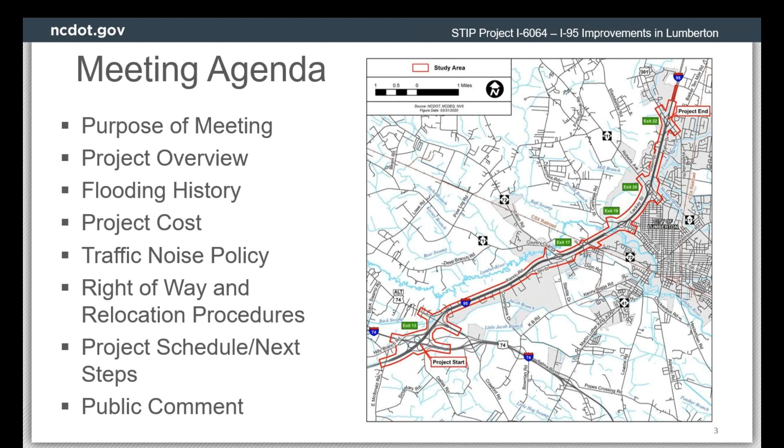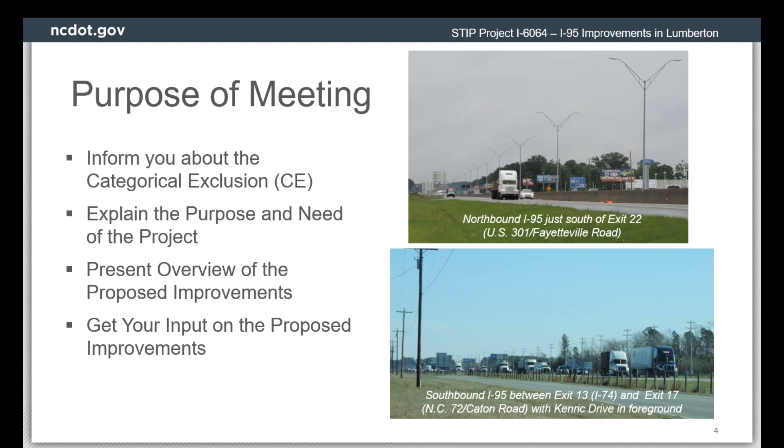So let's start with the purpose of tonight's meeting. Simply put, it's to make you, the public, a part of the project development process. It's just another important step in our continual efforts to make you a part of the process. Specifically tonight, we want to get your input on the proposed design of the project. Project materials, including maps and videos, are available online on our webpage.

Hey Greg, I can hear everybody now. Okay, for those joining via phone only who do not have the visual, please go to our website, ncdot.gov, and in the search bar put I-95 Widening Lumberton, and it will take you to our webpage.

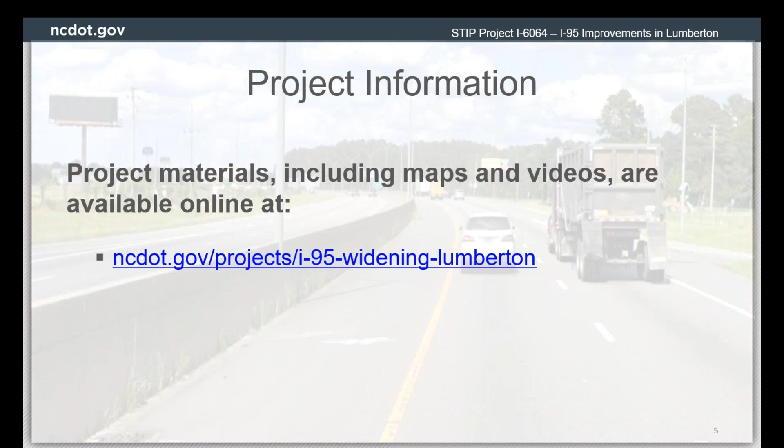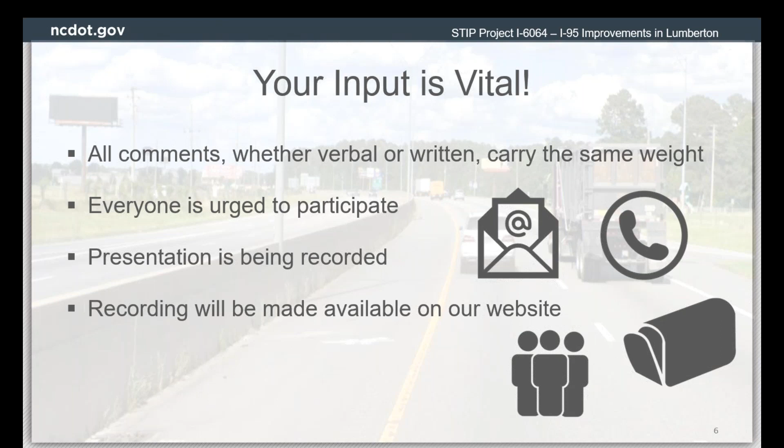Now, your input is extremely important to the development of this project and any other NCDOT project. All comments, no matter how they are submitted, carry the very same weight. We have provided multiple ways for you to participate in this process, and you can do that by submitting your comments here during this live virtual meeting.

You can also go to our website where there's a link to our public engagement portal to provide feedback. You can also send an email, and for those joining via phone only, I'll read it out: I-95lumberton@publicinput.com. So let's say you're not a big fan of computers or technology.

You can call in your comments or questions using our toll-free project hotline. That number is 855-925-2801, and enter the project code 8812. I sometimes joke, if you have a carrier pigeon, you can send that in as well. But the point I'm trying to make is that it's important, and I can't stress enough the importance of you getting your comments into us on this project. The comment period ends October the 15th.

Now you may be asking yourself, well, what are you going to do with the input that you receive? Once the comment period has ended, we will hold what is known as a post-hearing meeting, or post-meeting meeting in this case. This meeting is attended by NCDOT staff from various units and divisions, all of which have had or will have involvement with this project.

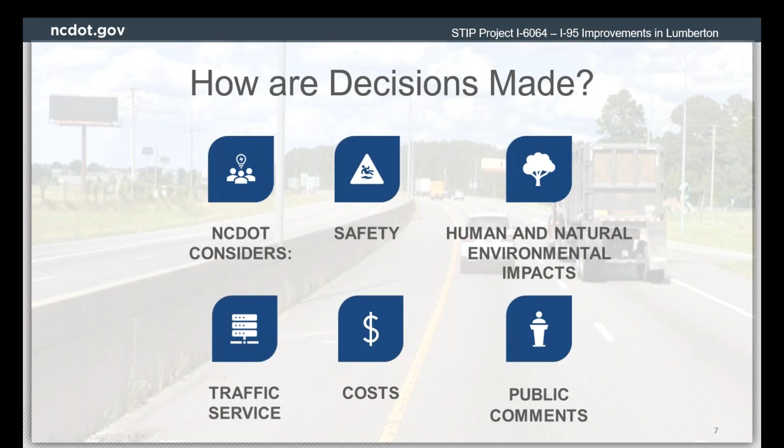Now, the project is being paid for through a mix of federal and state funds.

So let's talk about the why of the project. In transportation terms, that is known as the purpose and need of the project. All alternatives or designs are compared against the purpose and need, and how well they meet it. The traffic volumes along I-95 are anticipated to increase by about 50% by the design year 2040, which will create conditions in which operations degrade and average travel speeds are below the posted speed limit. Forecasted traffic volumes are expected to exceed 100,000 vehicles per day in some locations within the project study area. So to meet this need, the purpose of this project is threefold: to help relieve congestion, improve mobility, and enhance resiliency of this corridor to storm events such that it can continue to serve as a primary East Coast route through the project design year 2040.

The proposed improvements meet the purpose and need of the project. Potential secondary benefits include improved safety, enhanced emergency services, and military preparedness.

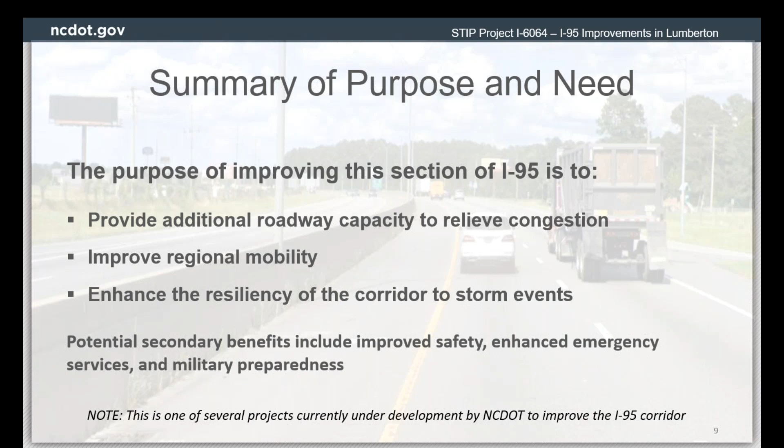Now, the proposed improvements are consistent with the long-range transportation plans for municipalities within the study area. Local governments within the Lumber River Council of Governments, as well as NCDOT, have included this project in their adopted plans.

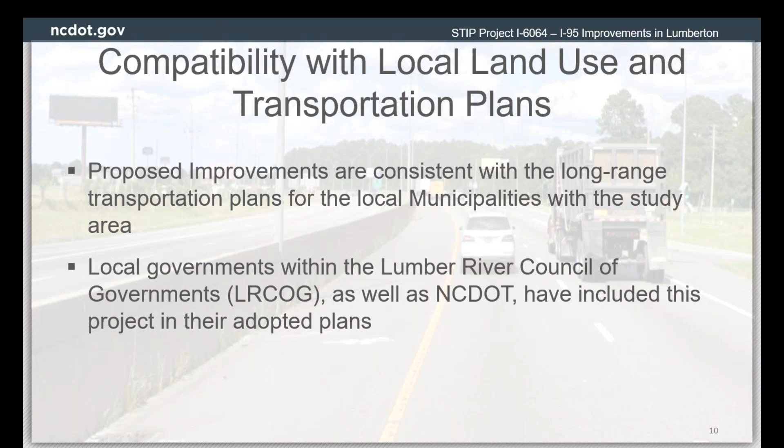So again, to meet the purpose and need of the project, the proposed design would improve about 9 miles of I-95 from I-74, or exit 13, to US 301 Fayetteville Road, which is exit 22 in Lumberton.

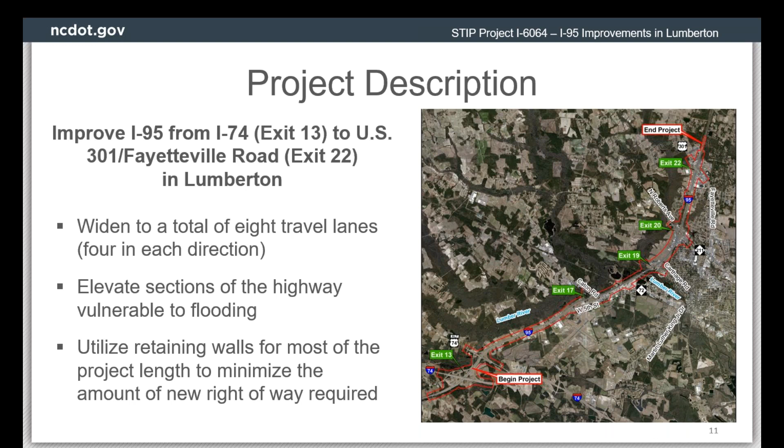This will be done by widening to a total of 8 travel lanes, that's 4 in each direction, and elevating sections of the highway that are vulnerable to flooding. To construct these improvements while maintaining the existing service road system and minimizing the amount of new right-of-way needed to construct the project, the design will utilize retaining walls for the majority of its length.

Now, I-95 in the vicinity of Lumberton has experienced major flood events recently: Hurricane Matthew in 2016 and Hurricane Florence in 2018. Both storms resulted in a partial or complete shutdown of the highway within the project limits until those floodwaters receded. To improve the resiliency of this vital interstate facility, the highway will be elevated in vulnerable sections and major hydraulic structures will be improved.

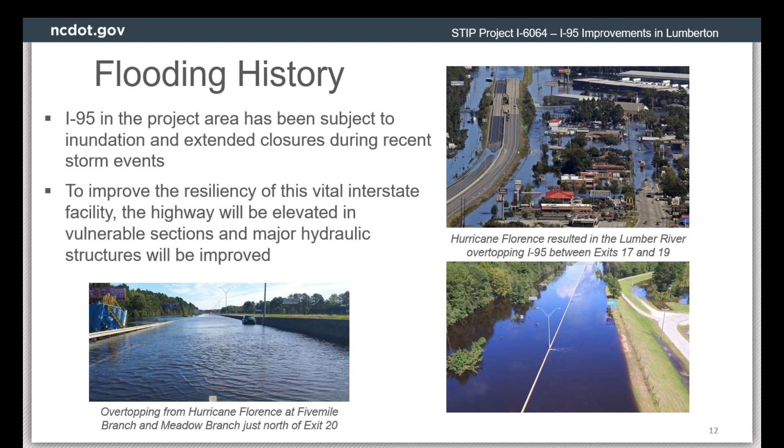So to inform the design process, we conduct detailed hydraulic studies to determine the appropriate roadway elevation to provide resilience against a 100-year storm, which is our current policy. Our past policy involved designing projects to accommodate a 50-year storm.

Now, ultimately, the preliminary roadway designs will raise I-95 in the vicinity of NC 72, or exit 17, between 4 and 6 feet. In the vicinity of Meadow Branch and 5 Mile Branch, I-95 will be elevated between 4 and 8 feet, with the largest elevation change occurring at the new Lumber River Bridge, where the main line of I-95 will be raised by about 13 feet.

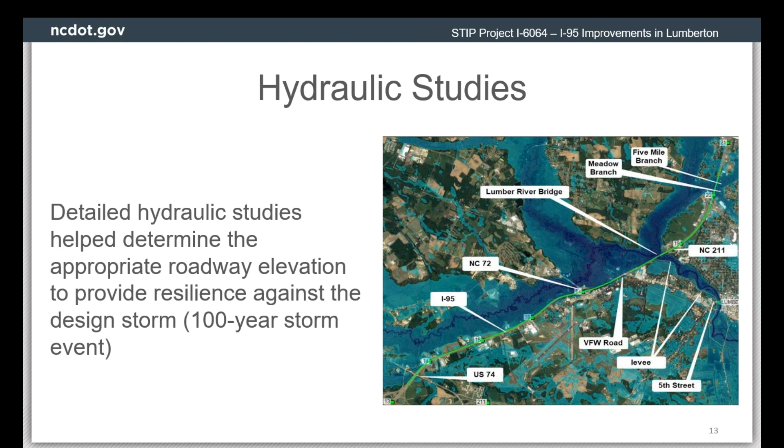The interchanges at either end of the project, the I-74 and the US 301 interchange, which is exit 13 and exit 22 respectively, are anticipated to remain largely unchanged.

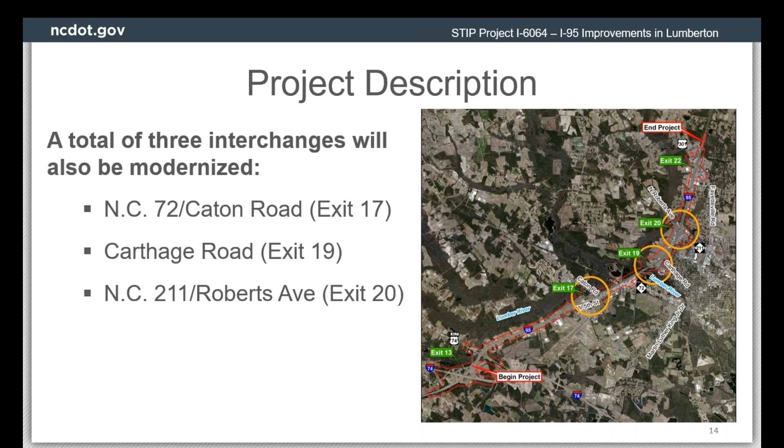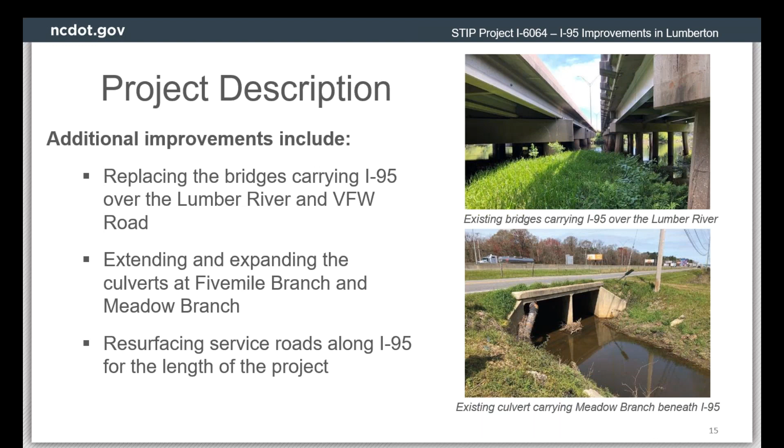Additional proposed improvements include replacing the bridges carrying I-95 over the Lumber River and VFW Road, and extending and expanding the culverts at 5 Mile Branch and Meadow Branch to add stormwater capacity. Service roads along the length of the project will also be resurfaced.

And we'll take a quick, more detailed look at these interchange improvements.

At NC 72, or exit 17, the existing diamond configuration and traffic signals will be retained. The bridge carrying NC 72 over I-95 will be replaced. Now, the bridge carrying NC 72 over the Lumber River will not be replaced as a part of this project.

Also, to the east side of the interchange, median and sidewalks will be added along 5th Street within the project limits.

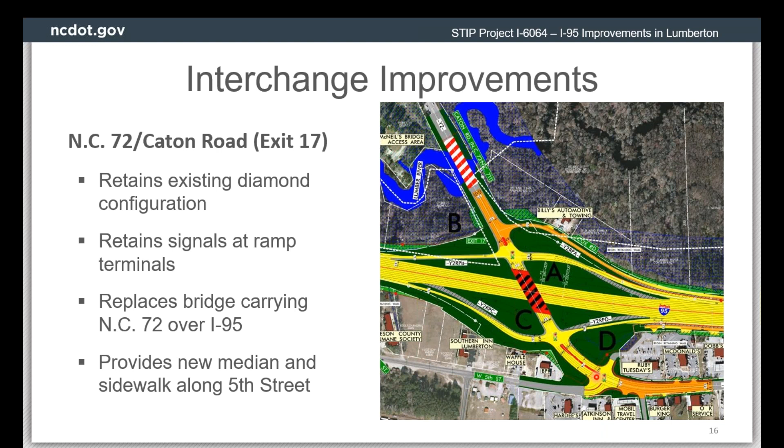Now, at Carthage Road, which is exit 19, the existing diamond configuration will be retained. However, at the on and off ramps, which are now stop controlled, they will be replaced with roundabouts on either side. A video showing how to navigate a roundabout is posted on our project page.

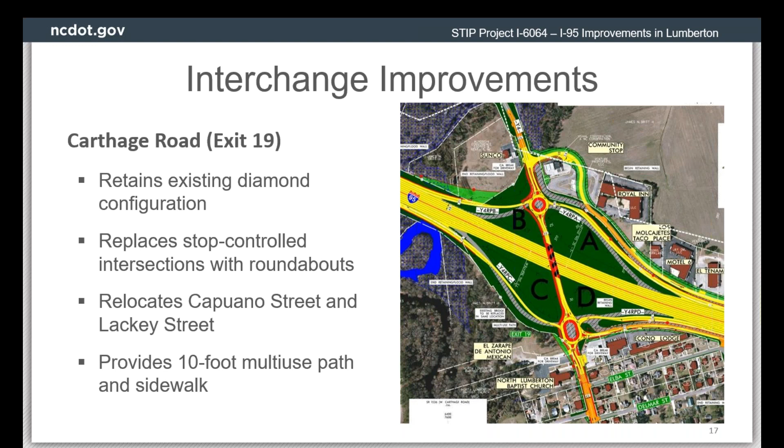Also, to accommodate the reconstructed interchange, the service roads, Lackey Street and Capuano Street, will have to be relocated somewhat. Capuano Street will tie into this easternmost interchange at Carthage Road, and Lackey Street will tie in with Carthage Road just to the west of where it does currently. A 10-foot multi-use path will also be constructed along Carthage Road and across the bridge over I-95.

At NC 211, Roberts Avenue interchange, which is exit 20, the existing partial cloverleaf configuration will be replaced with a diverging diamond interchange. This proposed design will look and operate similar to the diverging diamond interchange at I-95 and US 301, exit 22, which is just 2 miles north of here. We do have a video showing the general operations of a diverging diamond interchange on our webpage. I encourage you to watch that.

The project will also replace the existing single bridge carrying NC 211 over I-95 and replace it with 2 bridges.

There will also be some resurfacing, grading, and realignment work required along the parallel service roads: Lackey Street, Capuano Street, Dawn Drive, and Pond Drive. A 10-foot multi-use path will be provided across one of the bridges and extend to the western project limits to provide a more walkable connection to the nearby French Park.

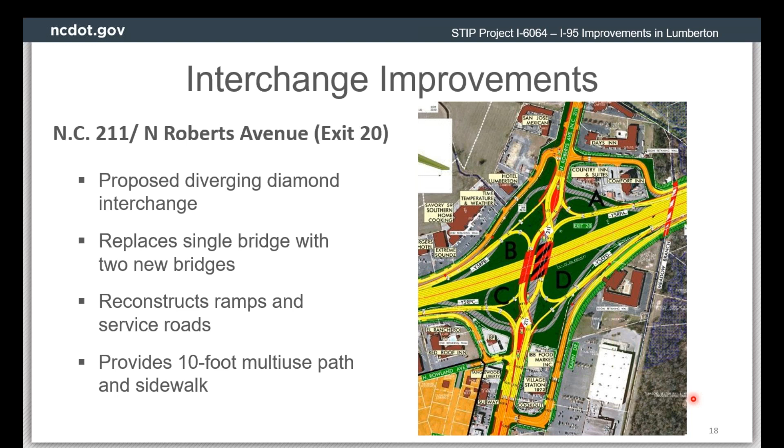Now we will review the roadway cross sections. As mentioned earlier, all of the cross sections include a total of 8 12-foot travel lanes, 4 in each direction, with paved inside and outside shoulders and a concrete barrier median. As shown on this slide, cross section 1 utilizes retaining walls along the outside shoulder to contain the widened and elevated interstate. Cross-section 1 will be used for the majority of the project corridor, though the wall height will vary depending on the proposed elevation change along I-95.

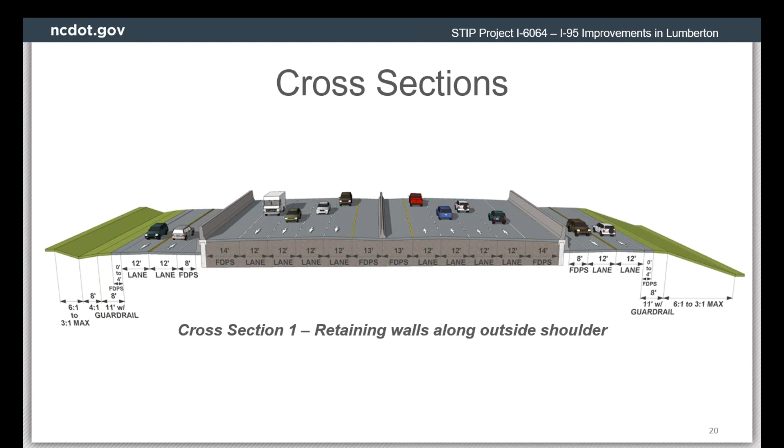Cross-section 2 includes a concrete barrier along the outside shoulder rather than a retaining wall. This cross-section will be used in areas where parallel service roads are present and the elevation of I-95 will remain generally unchanged. A combination of cross-section 1 and cross-section 2 will be utilized at the southern end of the project between exit 13 and exit 17.

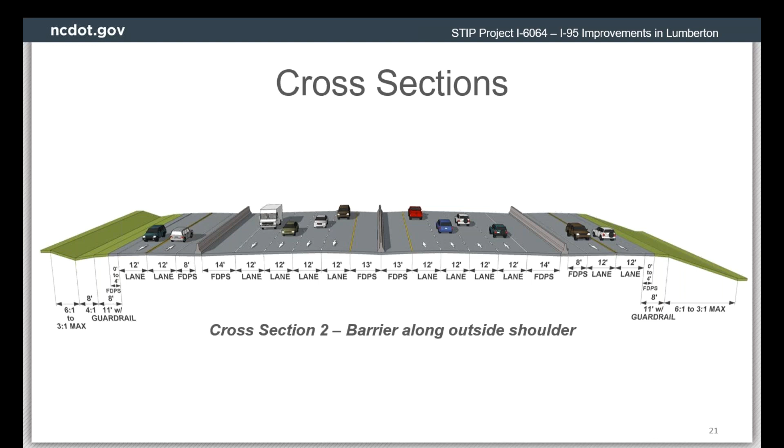Cross-section 3 will utilize grass slopes along the outside shoulder instead of a retaining wall or barrier. This cross-section will be used in areas where parallel service roads are not present, generally including the southern and northern project limits and between the on and off ramps at each interchange.

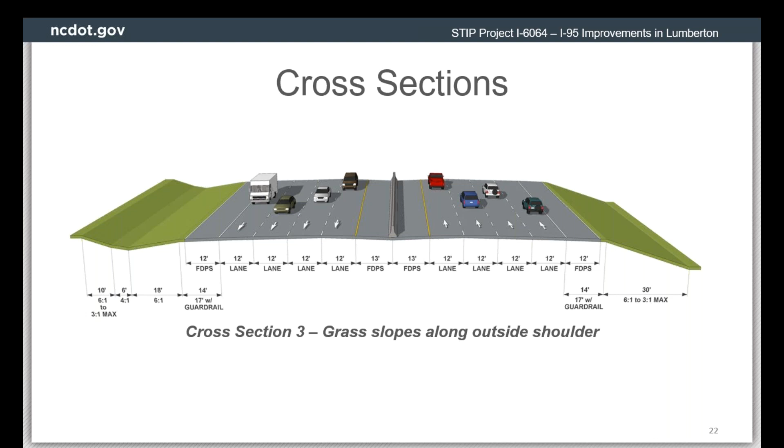Preliminary cost estimates have been prepared for this project. The estimated costs are as follows: $40 million for right-of-way acquisition, $1.2 million for utility relocation, and roughly $418.6 million for construction. That adds up to a total estimated project cost of $459.8 million. Please note these cost estimates are preliminary and subject to change.

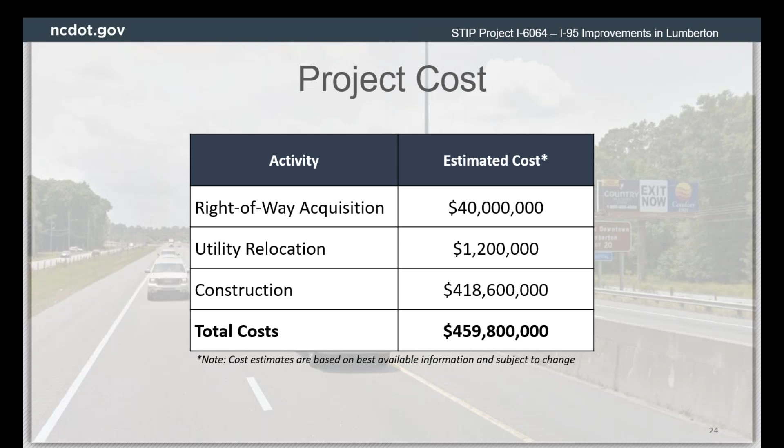A tentative schedule has been developed for the next steps of the project. Following this meeting, we'll have a post-meeting process where we go through and summarize all the comments and respond to them, incorporating them where feasible into the project.

All of this work leading up to this step will be cataloged and captured in the federal categorical exclusion, the environmental document being prepared for this project. It is expected to be completed this winter. The project will be awarded for a design build in summer of next year, with right-of-way acquisition beginning shortly after in the fall. If you have any questions about the design build process, please enter those in the chat box.

Construction is planned to begin in 2022 and last through 2026.

The design build process allows the department to hire a team of contractors and designers responsible not only for the final design of the project, but also the right-of-way acquisition and construction. This process is more efficient than our traditional process, resulting in faster completion dates because it gives the design build team more flexibility. The team could be purchasing right-of-way in one section, finishing design in another, while constructing yet another portion. As a result, over the years we've seen innovative designs that further reduce impacts and costs.

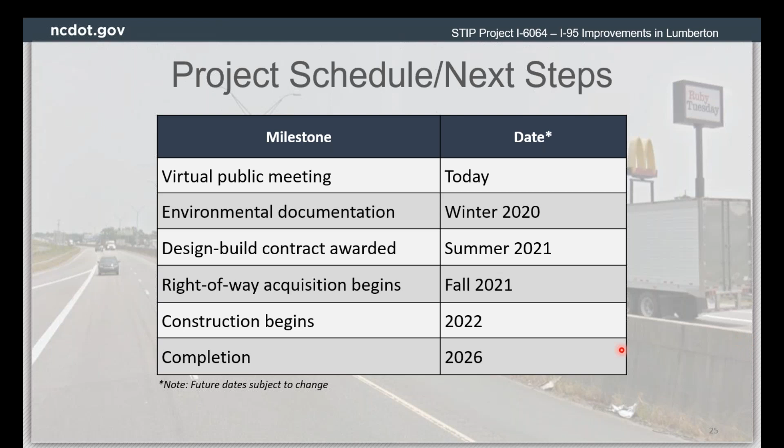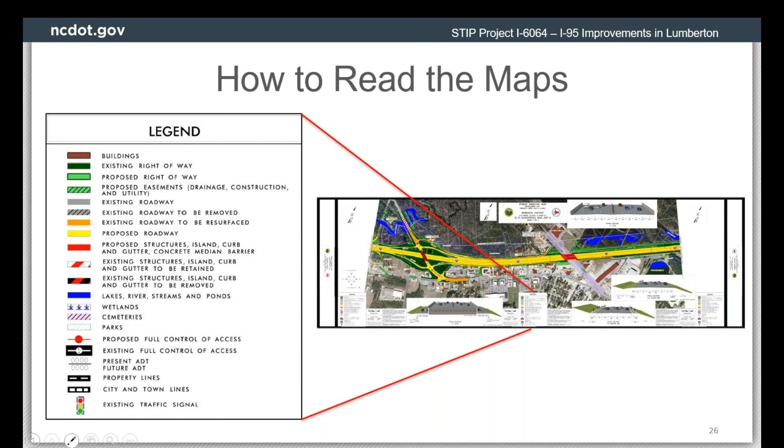The public meeting maps I mentioned earlier are on our website. I'm not going to go through each map right now, but each map includes a color-coded legend representing the proposed improvements. We have a video describing how to read those maps on our webpage, so I encourage you to look at that and review the maps. And if you have questions, contact the project team.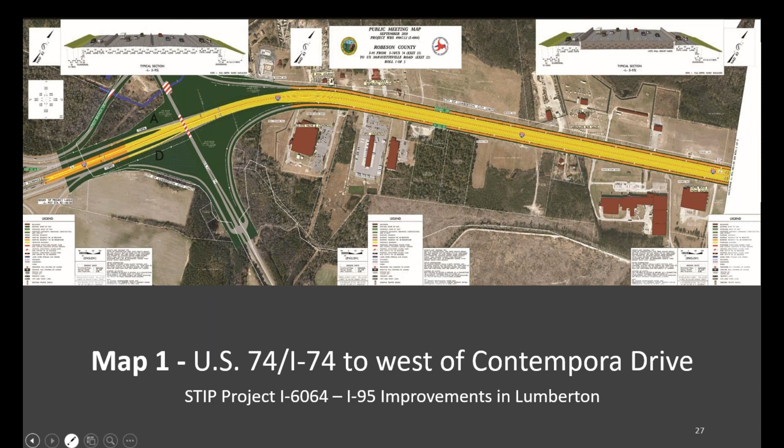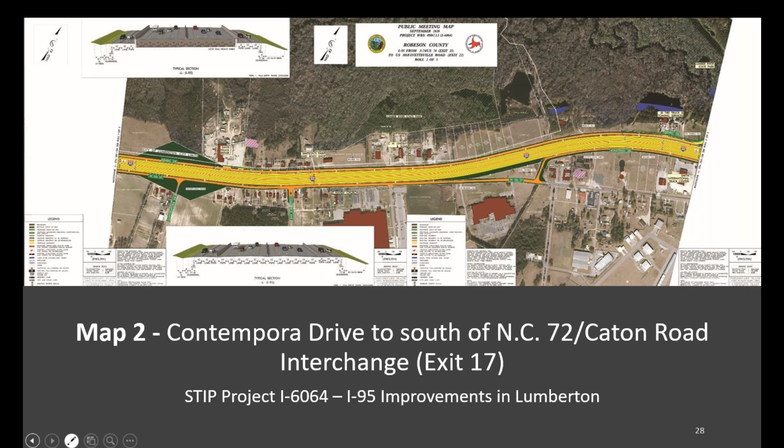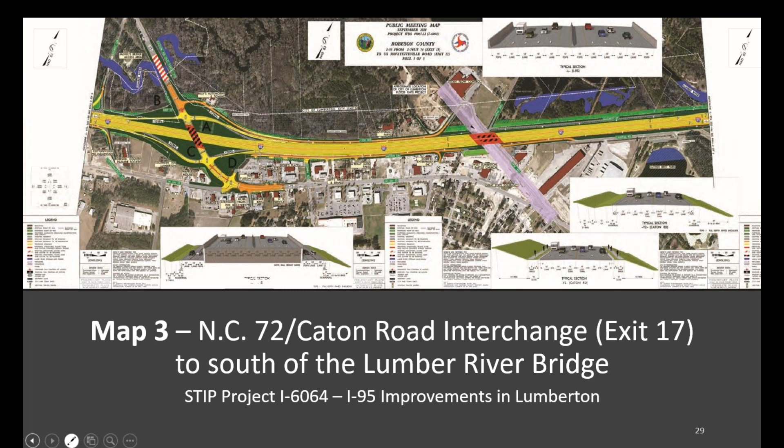There are 5 maps. Map 1 runs from US 74 or I-74 to west of Contempora Drive. Map 2 runs from Contempora Drive to south of the NC 72 Caton Road interchange, exit 17. Map 3 runs from exit 17 to south of the Lumber River Bridge. Map 4 runs from the Lumber River Bridge to Wellington Road. And map 5 runs from Wellington Road to just north of the US 301 Fayetteville Road interchange, exit 22.

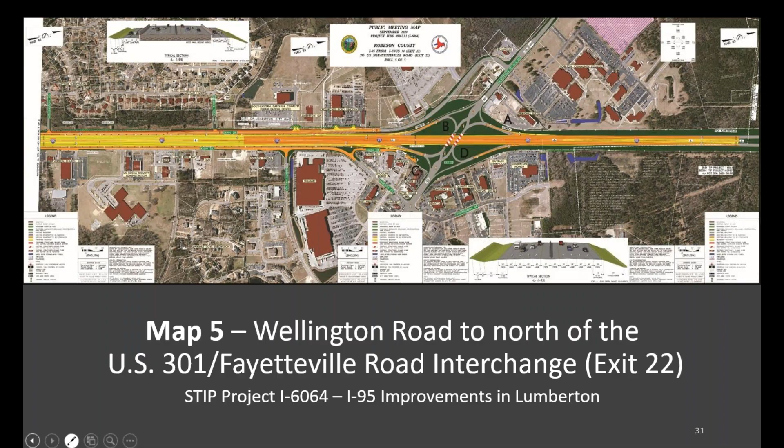Since I did not review the maps with you, I'm going to play a visualization for you, a 3D rendering of the project, which I think is more beneficial for understanding the proposed improvements. We'll go through this, and it takes about 3 minutes.

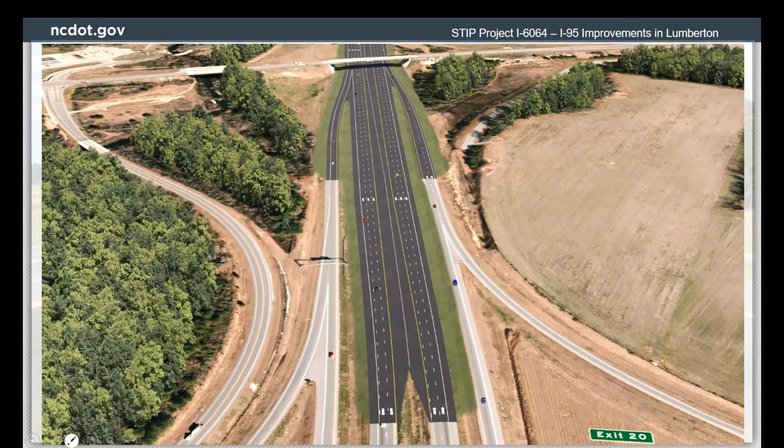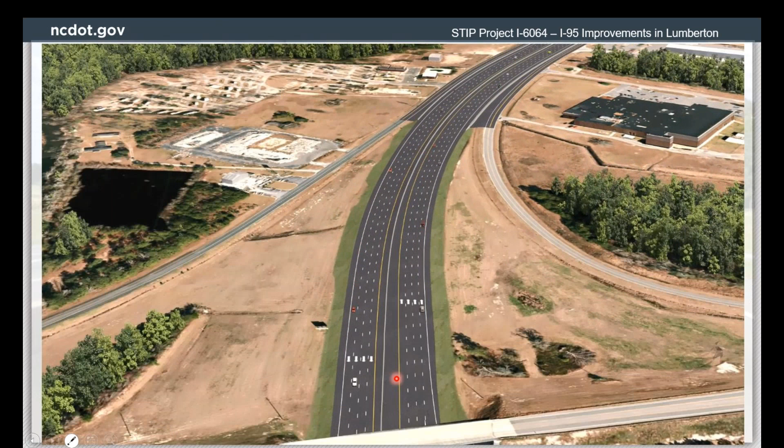All right, so here we are at the I-74 interchange. As you head north, this will be Kenrick Drive on your left, the west side of the project, and on the right you have West 5th Street.

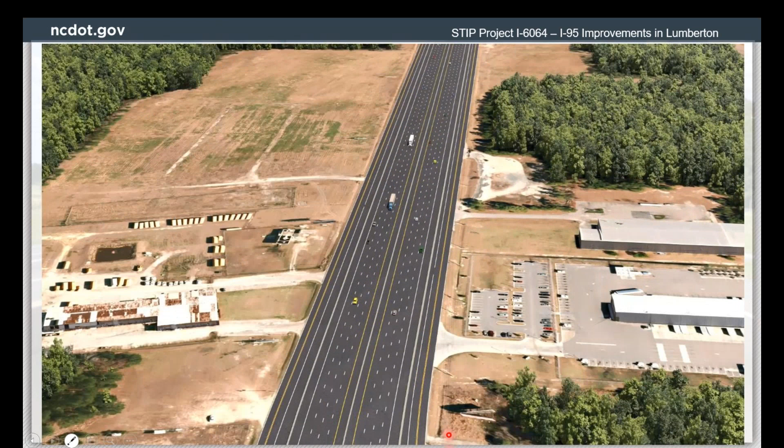While we're traveling along, I wish I had some music playing, but I do want to give kudos out to our visualization team for bringing this project to life.

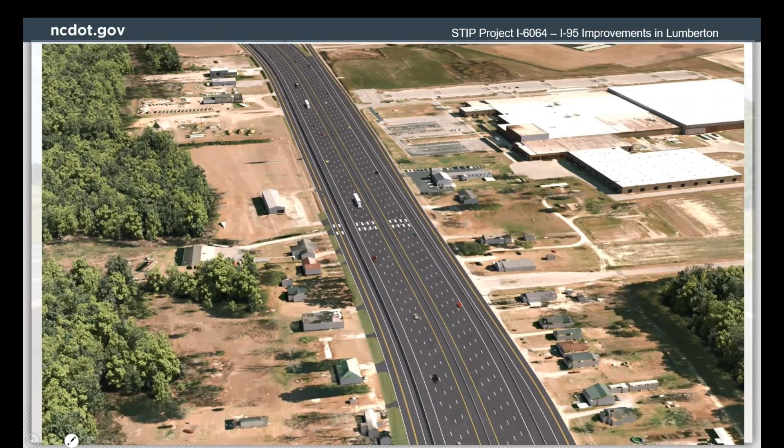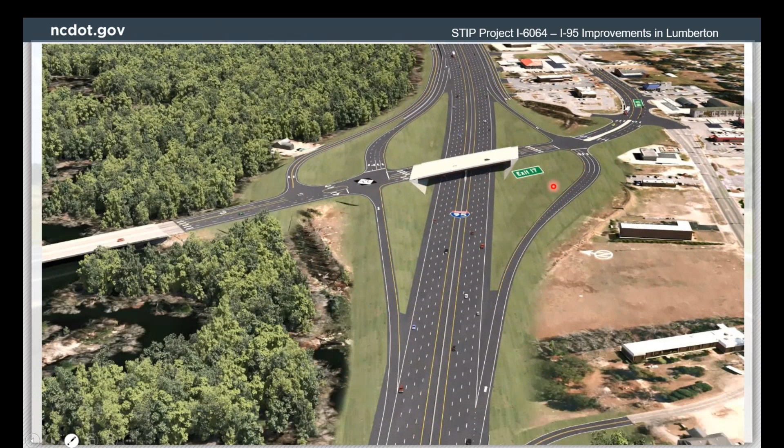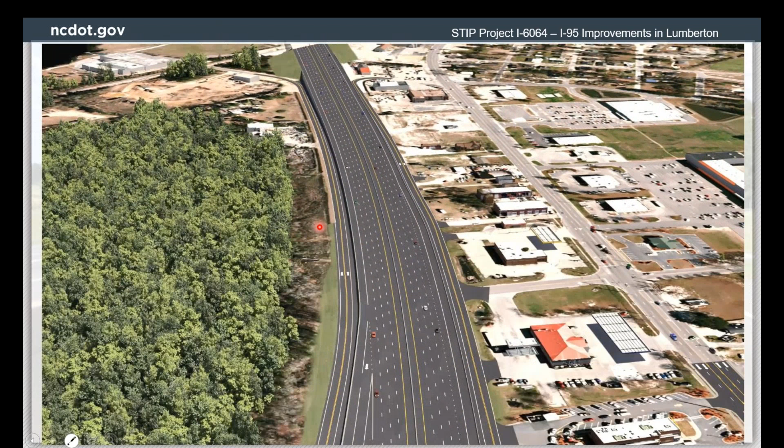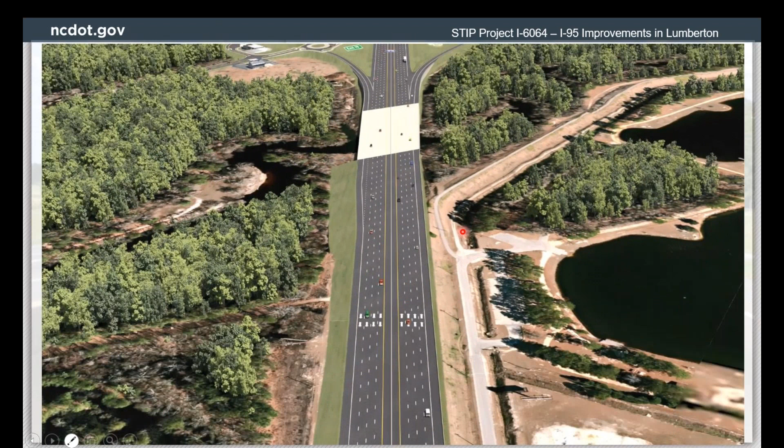We're coming up on Jonathan Drive, adjacent to I-95 here. We come up on exit 17, again keeping that diamond interchange. Here we have Cox Road on the left, with a drive on the east side. Here's West 5th Street, VFW Road, and the CSX Railroad crossing. And here's Crystal Road. The bridge crossing, here's exit 19, again these are roundabouts.

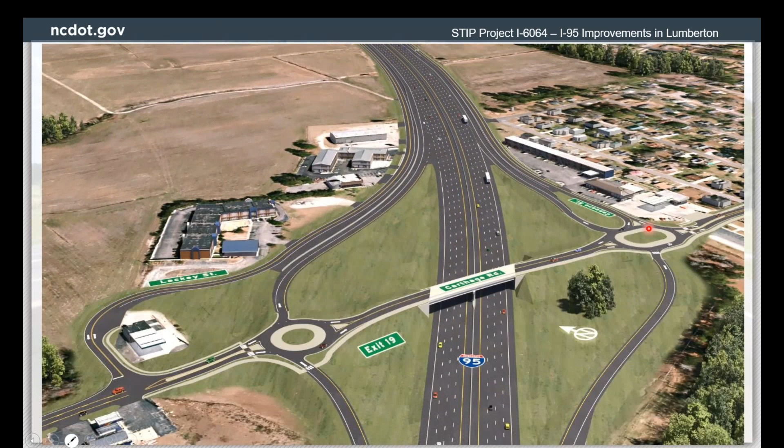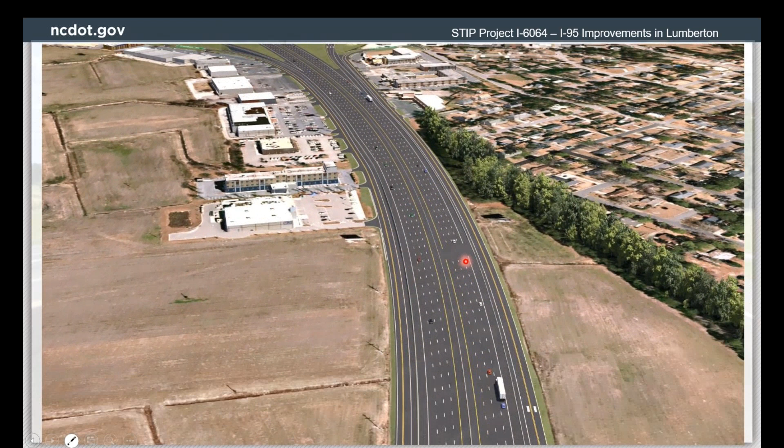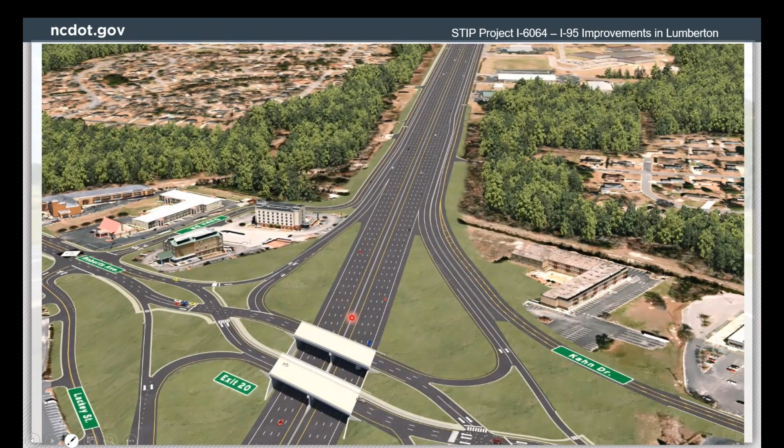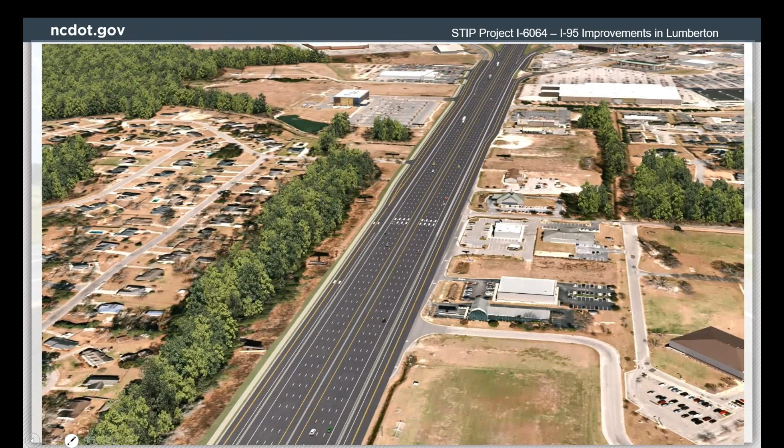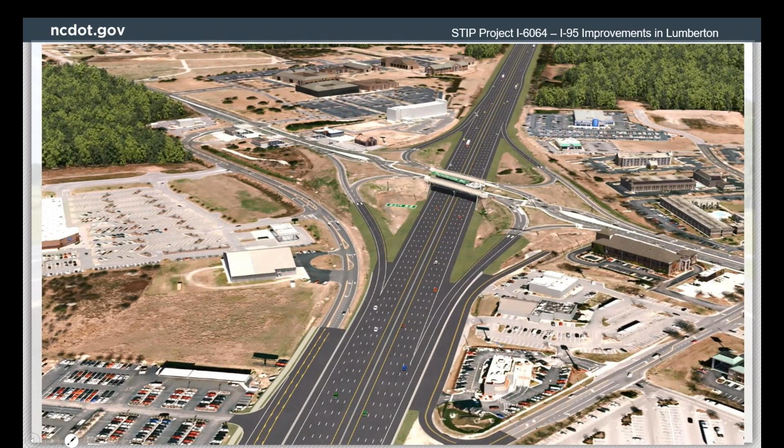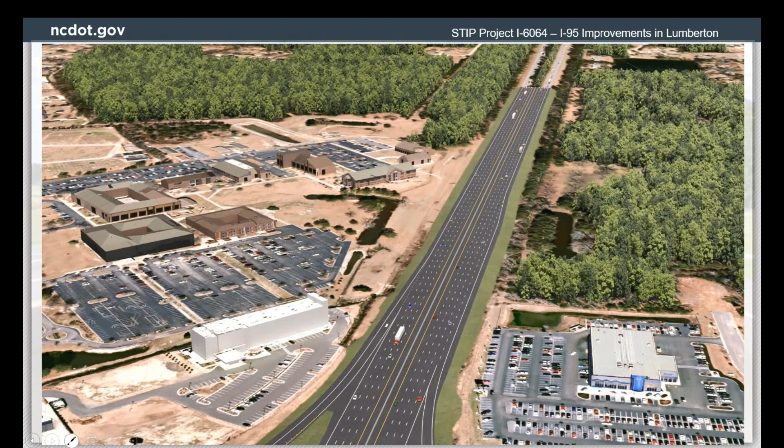We're approaching exit 22, which is US 301, and again no real changes to this interchange. The project limits will extend about a half mile north of here, where they will tie into another I-95 project, I-5987, which widens I-95 from exit 22 to exit 40.

Now real quick about traffic noise. Preliminary noise analysis for this project is currently underway. The location of noise barriers will be determined during final design. To be considered for noise abatement, a land use must have a building permit issued on or before the date of public knowledge, which is the approval date of the final environmental document. For this project, that is the categorical exclusion, or CE, which is being prepared and expected to be approved this winter.

Once recommended noise barrier locations are identified during final design, all property owners and tenants who are benefited by a barrier will be asked to vote on it. At that time, NCDOT will contact property owners and tenants eligible to vote and explain the balloting process and what they are being asked to vote on. Only recommended noise barriers that pass the voting process will be constructed.

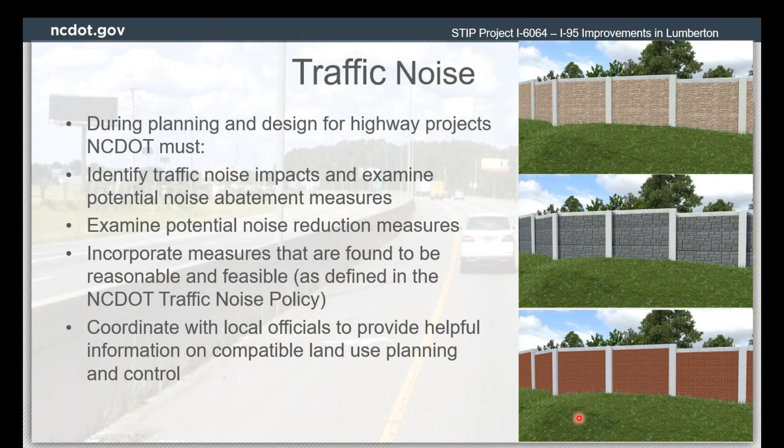Having runaway mouse issues, please excuse me.

Let's talk about the right-of-way procedures. Once decisions are made regarding the final design of the project, the limits of the project will be staked in the ground. If you are an affected property owner, a right-of-way agent will come out to meet you. They will explain the plans and how it affects you as a property owner and your rights. If permanent right-of-way is required from you, an appraisal will be completed, and based on that appraisal, a right-of-way agent will come back out and make a written offer based on the current market value of the property at its highest and best use.

In this process, the department must treat all owners and tenants equally. We must fully explain the owner's rights, pay just compensation in exchange for property rights, and also furnish relocation advisory assistance. If your home or business is to be acquired and you're being displaced as a result of this project, additional assistance in the form of advice and monetary compensation is available.

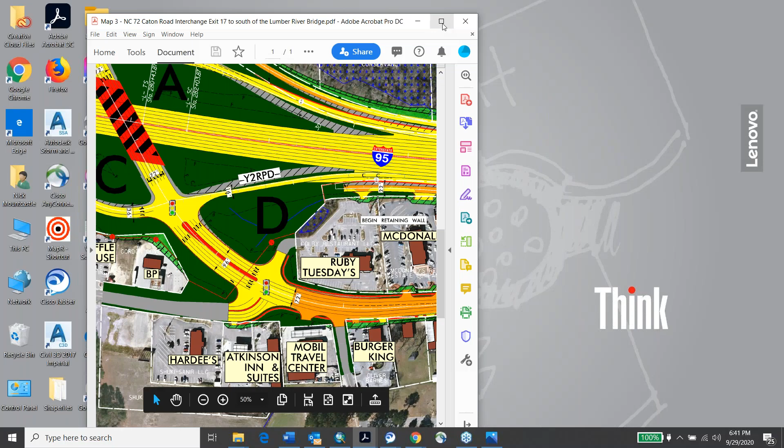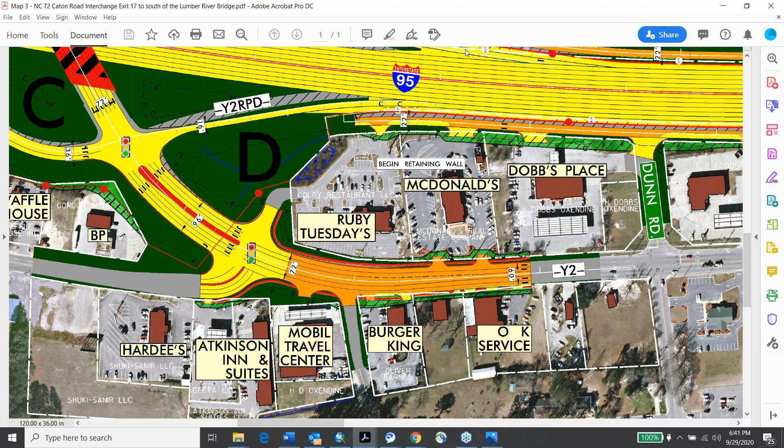So we're zoomed in here at 5th Street, and you can see these red lines represent the 5-foot sidewalk on either side of the facility. That goes back essentially to the OK Service building and Dobbs. So yes, to answer your question, sidewalk will be on both sides of 5th Street. All right, thanks Nick.

So next question is from Mr. Clark O'Neill. Currently on the southbound side of 95 between exit 19 and exit 17, there isn't a service road. Is there plans to add a service road between these two exits with this project? Nick, would you like to answer that one?

Right now there is a service road, Cox Road, between exit 17 and VFW Road. That will remain as is, though it will be resurfaced. To the north of VFW Road there is Hackett Street, a partial service road that doesn't go on the north side of the Lumber River. At this time, the project is planning to potentially remove that, but we are coordinating with the city to provide additional access there. There has not been any discussion about providing a service road to the north side of the Lumber River that would connect to exit 19 at Carthage Road.

All right, thank you so much. Next, Mr. Brandon Love says the city of Lumberton has been working with a retail consultant over the past 5 or 6 years in an effort to recruit new commercial, hospitality, and retail businesses. Since Ruby Tuesday at exit 17 closed, our consultant has identified at least 2 potential retail developments which have shown interest in the site. One issue that continues to be brought up is the right-only driveway exit from the parking lot onto West 5th Street. Since the exit 17 bridge and approaches will be replaced, would it be possible to improve the alignment of this driveway entrance and adjust the signalization in order to accommodate a full service driveway? This would be a great improvement, which will no doubt increase the marketability of the Ruby Tuesday site.

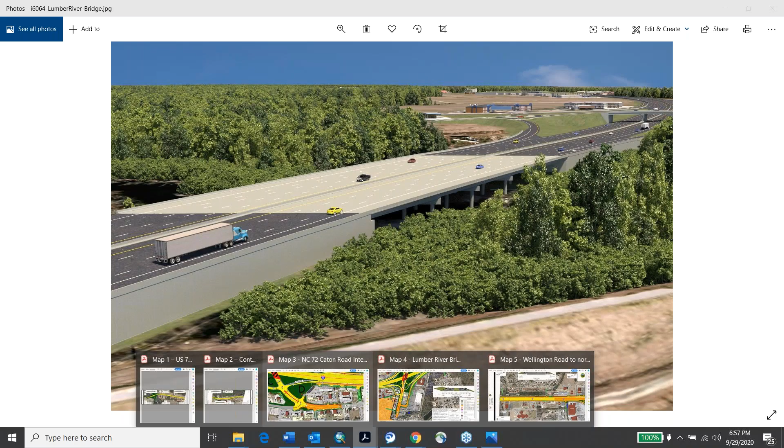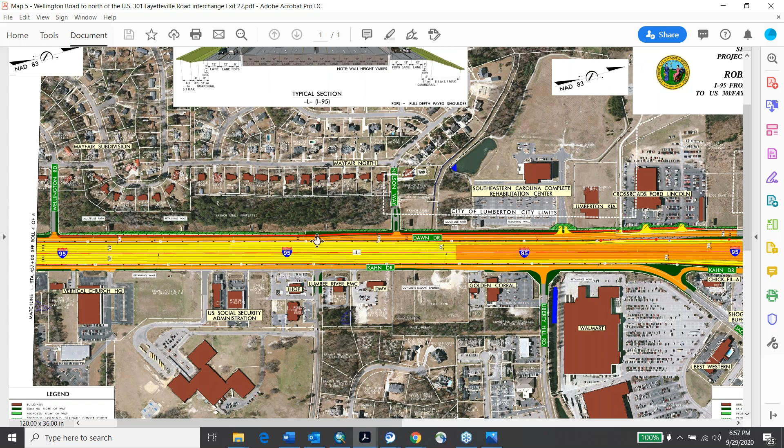So the vicinity of exit 22 that shows up on map 5, along Don Drive and Kahn Drive, are largely within their existing footprint. These areas of green hatching are proposed easement, so there are some minimal areas of that as you approach exit 22. Moving to the north here, you can see the proposed roadway width is very similar to the existing roadway width. And again, at exit 22, we're proposing to retain those bridges in the existing interchange configuration.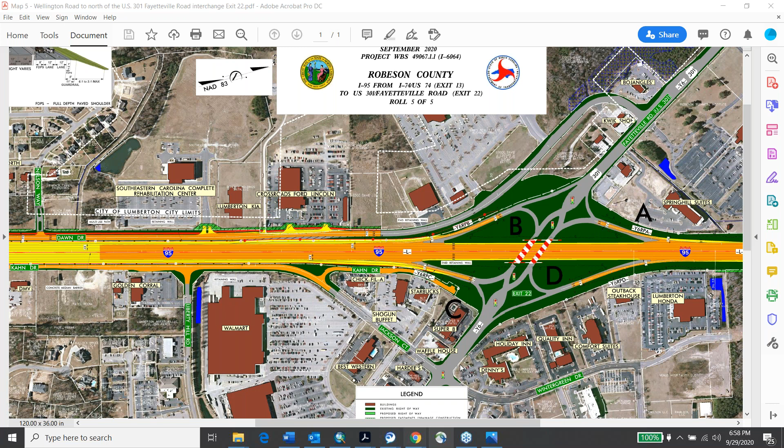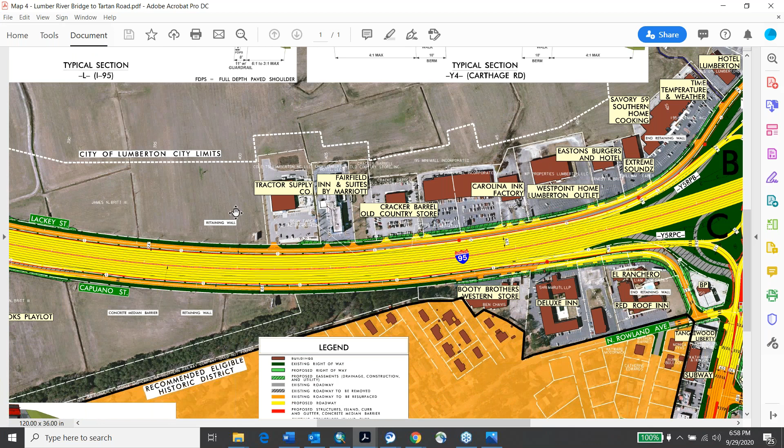All right, Nick, don't go anywhere. The next question from Pradeep Sharma is, what are the impacts on Lackey Street? I guess if you could just run down the two maps of Lackey Street, I believe most of the impacts would be on the southern end with the relocation.

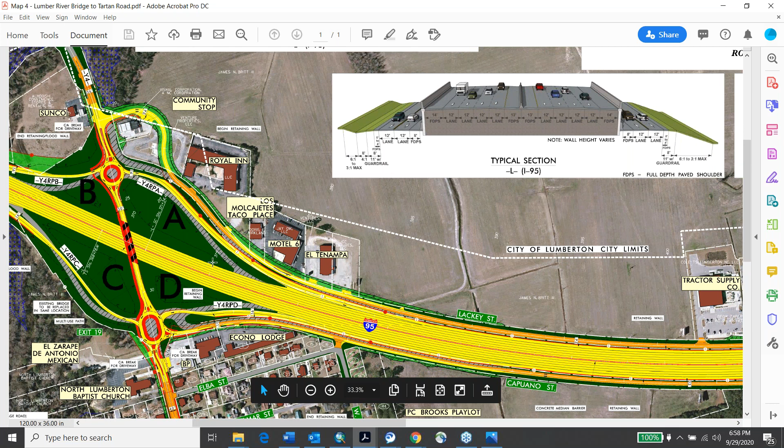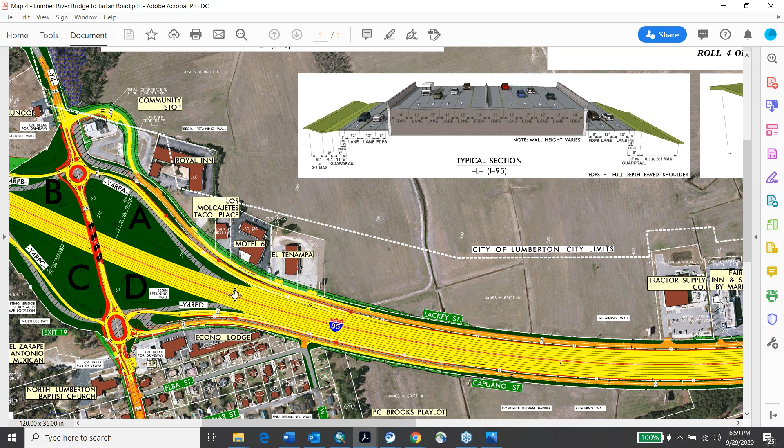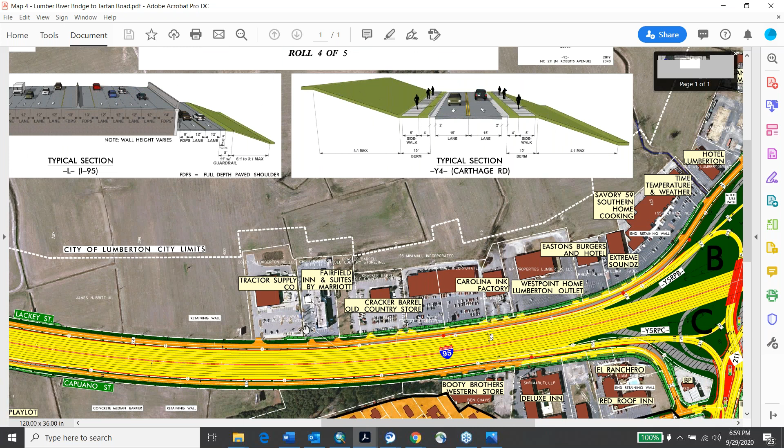Yeah, that's correct. Let me just get back to this map here. Can you all see the Carthage Road interchange now? Okay, so this is Lackey Street up here on top of the screen. This is the proposed relocation down at the southern end at Carthage Road. Anybody in this area might be familiar with that under the Carthage Road interchange project. We are showing some additional construction easement and right of way leading up to that. As you move to the north, Lackey Street is again generally in its existing location. Coming up on exit 20, there are some additional areas of construction easement moving through here, but we are not looking at any relocations, just some minimal work to Lackey Street along with resurfacing.

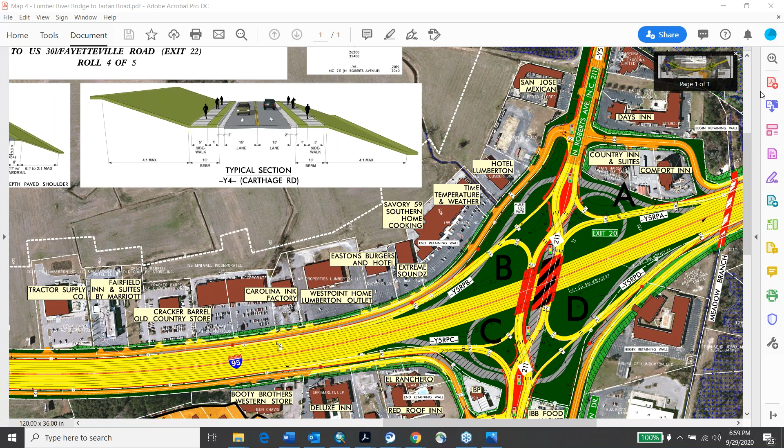Thanks, Nick. We have a couple of minutes left, actually one minute. The next question, from Mr. Pramit Patel: How does the timeline for this project compare with that for the I-5987 project?

Tony responded with our updated project webpage. Christy, do you want to speak to that? Hey Jamil, it's Christy. Those two projects, they're on about the same schedule and timeline.

Okay, all right, sounds good. And we'll take one more question. For the remaining questions that we didn't get to, I apologize, we ran out of time, but again, we will get back to everyone with a response to any questions. The last question is from Mr. Greg Gibson: What is the plan for water drainage and runoff at the Tartan Road section? It is known for flooding, and I worry about more pavement and not enough drainage.

I think Matt kind of answered that earlier, but Matt, would you like to address that question? Thanks, Jamil. Yeah, so for localized drainage, like for example, the drainage that's coming off the highway for the additional impervious area that we're adding, that'll have to go through a design from the design build team, and then it'll go through a review to make sure that we're not adversely affecting downstream property owners and things like that. So the water in areas like that coming from the new facility will be addressed through that design process and mitigated appropriately.